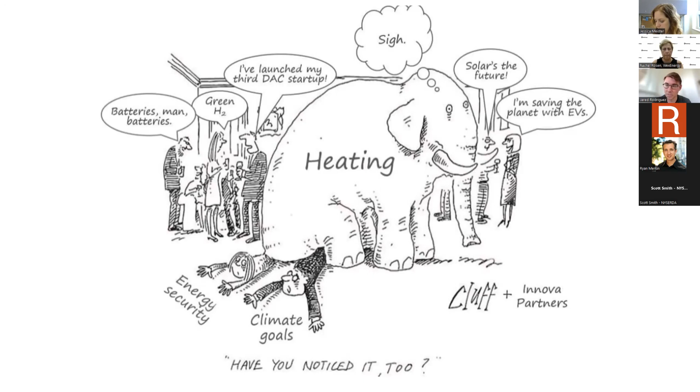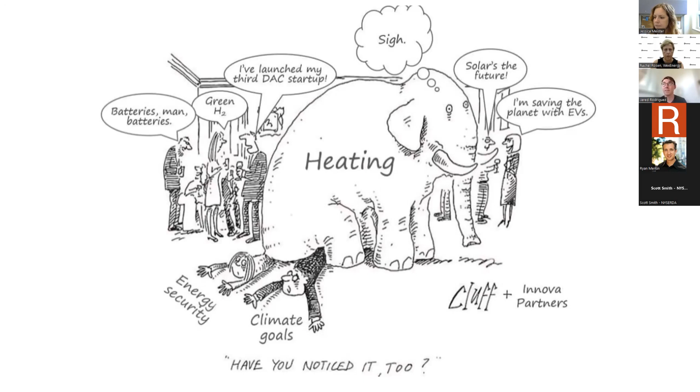This is a sort of funny cartoon where we've spent, I think, the last 20 years trying to ignore the elephant in the room, which is heat. There's a lot of good people talking about it, but in general in society we tend to ignore it, and we want to focus on solar, controls, software, lithium-ion batteries, and electric vehicles when we talk about decarbonization. Finally, we're starting to have that conversation around buildings and heat.

We're also starting to have it because we have this problem person we have to deal with on the border of Europe. So this issue of heat and natural gas, potential scarcity, is coming to the fore, and we're trying to determine ways to move our buildings and industry away from gas for geopolitical issues, and then obviously also for emissions.

It's really important to share that we've had the promise of very cheap natural gas for quite a while. We could talk about why and how that happened, but we can't necessarily rely on very cheap natural gas going forward, since it's now an international or global commodity.

With the fracking boom, there was an impetus to develop liquefied natural gas terminals and ship natural gas to other markets. With Russia now being offline in providing natural gas to Europe, a situation which is likely to get worse, other markets including Japan, China, and predominantly the EU are asking us for natural gas, and we will pay significantly more for it, particularly this coming winter.

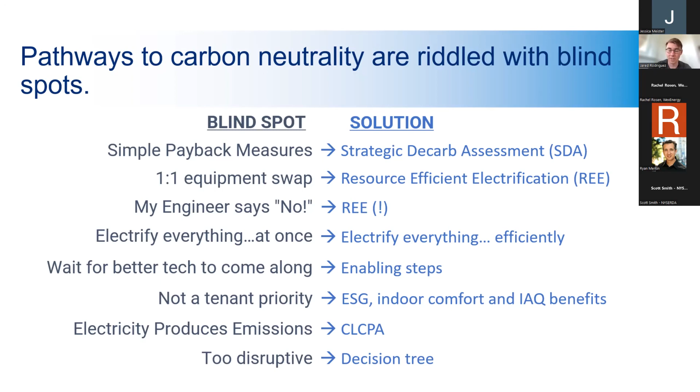And that this is too disruptive - well, then you just need a decision tree. You need a plan. You need to strategically plan for this over time and not just react to fire alarms if and when your boiler fails. Have a plan for your boiler so when it fails, you know what you're going to do.

So strategic decarbonization, or we could call it capital planning, is basically long-term financial planning for building owners to manage carbon emissions. The place to start is really to determine the term - what's the goal, in what year do you want to achieve carbon neutrality?

And it can be optimistic, progressive and forward-thinking. Even if you don't think it's viable, you should still set a goal, and then feed in the baseline starting point - all the existing conditions, how the building is operating - and develop a discounted cash flow model with as many scenarios as possible. If you have limited time, limit the number of scenarios you develop. But you have time to do this, because your goal might be in 2050.

Definitely value non-energy benefits - include that with energy savings in order to justify an investment. And it's also important to note that near-term years require more accuracy, obviously.

And then if we're looking out, it's more directional and sort of fuzzy. You can have fuzzy math if you're doing long-term planning. And then I think the idea of phasing in and strategically deploying retrofits in a particular order is absolutely critical.

So here's some high-level themes around what is driving this concept of resource-efficient decarbonization. We have a grid peak today, generally in July on a really hot day like yesterday, when a lot of folks are using electricity to cool. If we were to do unmitigated electrification, meaning very low efficiency electrification across the board, we would drastically increase that grid peak and shift it into the winter.

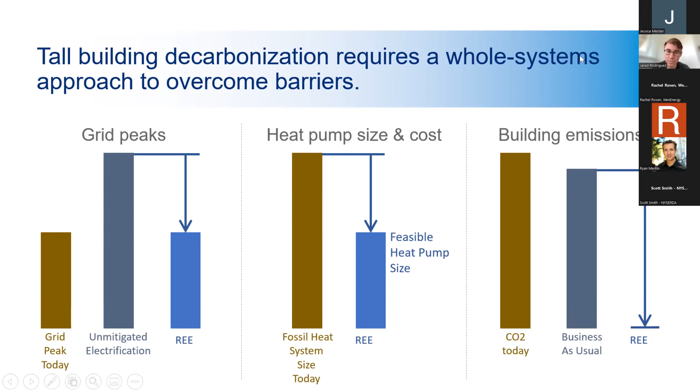We can do better than that, and we should be driving our coefficients of performance, which is basically the amount of electricity it takes to deliver a unit of heat, as high as possible.

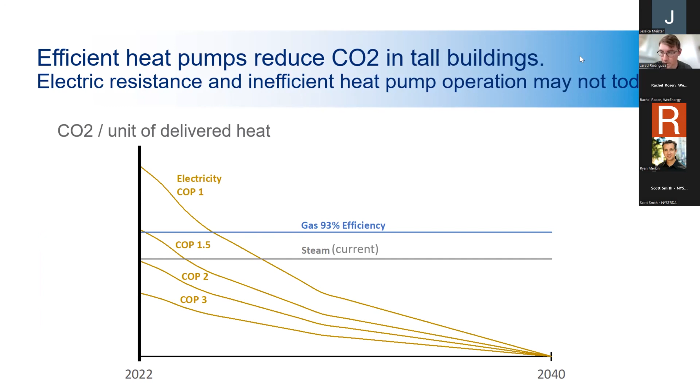This is a statistic I read recently: if we can, in general, create an average COP of 6, which might seem unattainable, but we'll talk about it, then we may not need to dramatically increase the size of our electric grid. So we need to be figuring out ways to drive that COP up, and there are ways.

So what is resource efficient decarbonization or electrification? Really, you could call it whatever you'd like. We've had pushback around the word electrification because it conjures some negative things, a lot of which comes from the 70s when people were installing a lot of relatively inefficient electric heat. So we've shifted our language toward decarbonization. Words matter, it determines how we think about things and how we approach buildings. We need to be aware of what language we're using with the general public when talking about how to approach this issue.

So what is it? It's an incremental methodology, an integrated design process or approach combined with strategic capital planning, that creates a path or multiple paths toward achieving carbon neutrality in buildings.

And so where do you start? On the left side, you start by reviewing that building in depth, understanding where natural gas is being consumed in the building, exactly where, when, why, how, and what that gas consumption profile looks like across various weather patterns and across the temperature spectrum the building experiences throughout the year.

Once you know that like the back of your hand, you can begin the process of targeted reductions in consumption. Reduce really is just energy efficiency, it's high performance buildings, it's what we were talking about earlier with window overclads and improving the thermal performance of an envelope. We need to reduce energy consumption in buildings, particularly on the gas side, on the heat performance side, before we dive into the work around electrification.

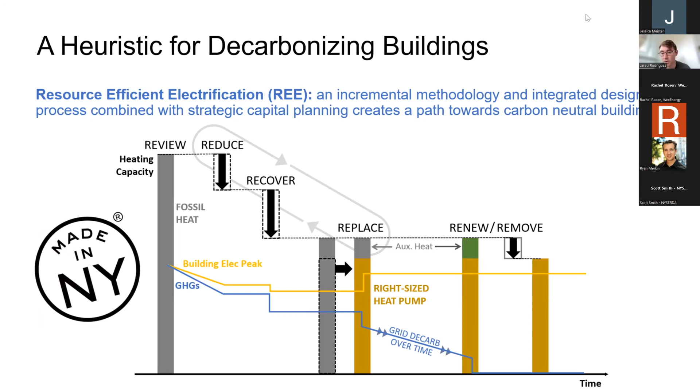Then, start the process of right-sizing heat pumps in a targeted approach that takes place over time to replace that heating capacity. This might mean that you're keeping auxiliary heat around for some time until the technology is available, until the capital is available to go all the way and eliminate your natural gas connection.

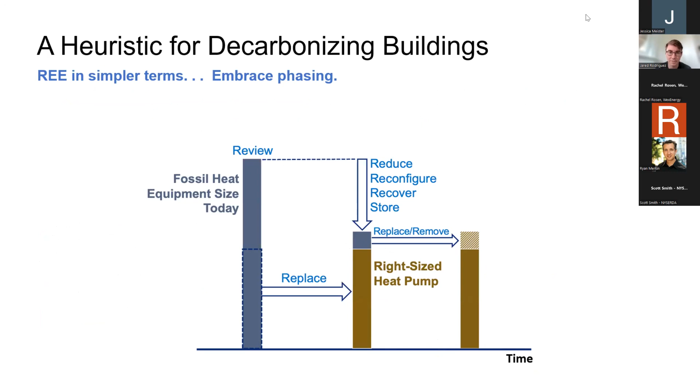I don't know why I show this. It's a simplified version of what I just showed you, but now you're an expert on it, so I don't have to spend time on it. Here's a number of different ways to review, reduce, reconfigure systems, and recover heat.

We know that one of the more efficient ways of moving heat around a building is through hydronic networks. This idea that there's a thermal energy network in a building, and we can capture heat where we're losing it and put it back into the building and move it to where we need it. Doing that in water is typically one of the better ways to do it.

I recognize that a lot of buildings don't have hydronic distribution. Commercial buildings, it's a little bit better. You do have a cooling tower loop that you could potentially reposition for heating. But it's something to consider.

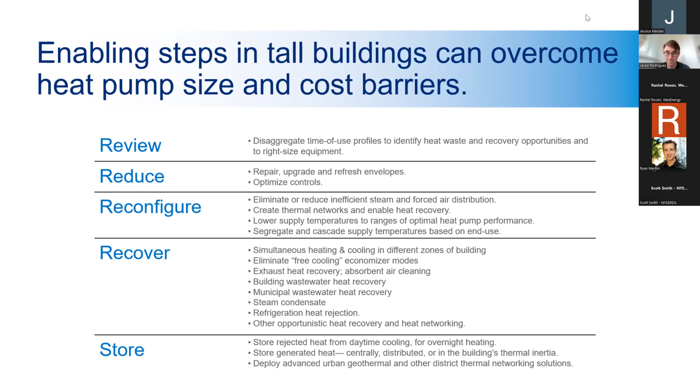We have partners in Empire Building Challenge that are core drilling. They're adding hydronic loops to their buildings so that they could do that heat recovery, hybridization with heat pumps. Then supplying heating and cooling to apartment units, for example, with fan coils.

So office buildings, there's a really interesting opportunity in office buildings to recover and store rejected heat and use that to heat the building. There's a number of ways to do it. There's tons of different technologies that can be integrated together with your MEP engineer and design engineer.

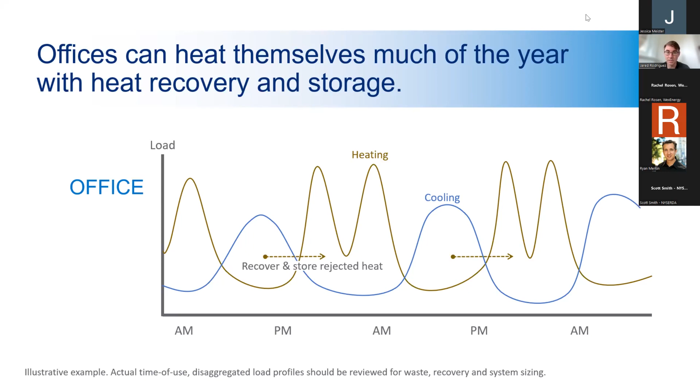But this idea that there's simultaneous heating and cooling, this is real, especially for some of our newer, very large glass office buildings. You have solar heat gain generally all year long, even in the dead of winter. And you've got data centers, and there's lots of heat being generated in these office buildings. So capture and try to put it back in.

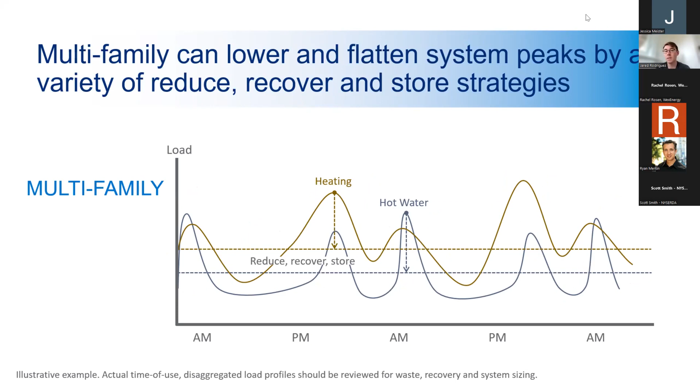In multifamily, it's sort of a different profile. There's like an AM high hot water use, and then there's sort of an evening high heating demand. Where those two things overlap are both difficulties, but also opportunities to reduce the peak electric capacity being consumed in the building in a high electrification scenario.

So I think all of that is to say that we need to be thinking about design integration. We need to be thinking about heat as electric capacity in a high electrification scenario. And we should be figuring out the most efficient ways of capturing, moving, and storing that heat over time so that it can be used where and when it's needed.

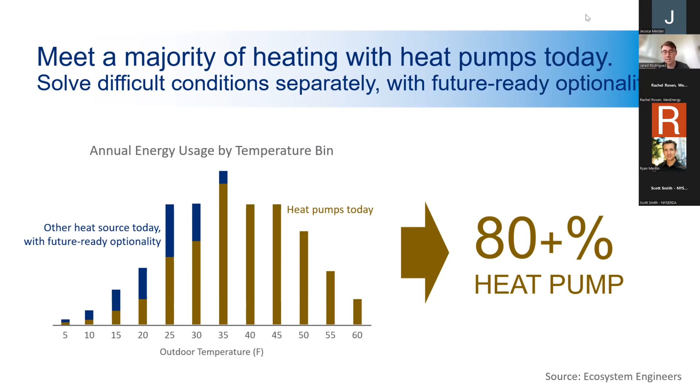So we shouldn't start a design project or an electrification project by focusing on that peak load, on those very cold temperatures, because I think you will find pretty quickly, especially in a large building, that trying to hit that peak load with, say, an air source heat pump is going to be exceedingly difficult for a whole variety of reasons. So it's better to start to think incrementally about it, break down the heating profile, and figure out how you can start to hybridize that building and deal with the lowest hanging fruit first.

Networked distributed heat generation, say with window air source heat pumps. We're seeing NYCHA do this actually, deploying relatively efficient air source heat pumps in windows and then networking those so that they can be modulated in a way so you're not peaking the building in the winter. And just the concept that we could be more efficiently producing heat at high COP by extracting waste heat, moving it around, and then thinking about what the future looks like, where we might be entering the public right of way and sharing some of that extracted heat between multiple building typologies.

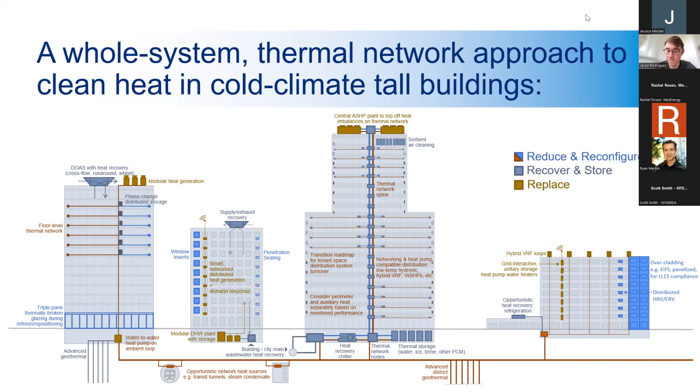So just to recap this decarbonization process, right? We start by assessing existing conditions, establish the goal, build the team. The team is critical. It should be diverse. It should include a lot of different verticals inside your organization.

Oftentimes big real estate companies are very siloed and they don't generally speak to each other. So asset managers aren't talking to engineers. It's kind of a mess. So everyone needs to get on the same page, speak the same language, talk to each other, and align on objectives, and then adopt that resource efficient electrification or decarbonization approach.

And don't be afraid to have design charrettes. If you don't know what a charrette is, it is multiple stakeholders around a table, iterating on ideas, poking holes in ideas, throwing even crazy ideas on the table to see if something sticks.

Then you can go about conducting that strategic decarbonization assessment, because you can then see what the full spectrum of potential options is for a particular building or even a district. And then you can go about the business of ranking that based on economics, doing your project prioritization, capital planning for that, and then refine and iterate, because conditions always change, right? So this is not a static plan, it has to change over time.

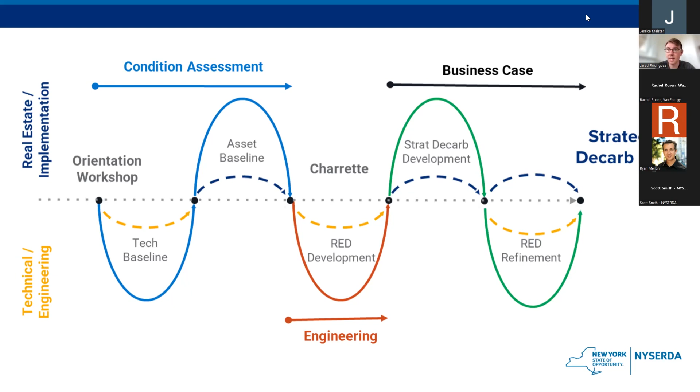So here's a graphic just showing what that process looks like in general. There's a back and forth between asset management or real estate and technical and engineering. This is the process we are using with our cohort partners in Empire Building Challenge: doing that technology baseline, what's in the building, doing the asset baseline, who's in the building and what does the building need to be to serve them, and then together developing that approach, that resource efficient decarbonization approach, strategic decarbonization planning, and then refining so that you can develop your final plan, which again is not static.

So just to jump back to thermal energy networks really quick, and this is sort of an add-on to this presentation, because all of this is new. I mean, that law just passed generally in June. Thermal energy networks are not new.

We have a system in Jamestown, New York, which is high temperature hot water. It's coming from a power plant, a cogeneration plant. It's serving every building in the central business district. That project started in 1984, and it was seeded by a grant from NYSERDA. So that's how long this goes back in the state of New York.

You can think of the Con Ed system as a thermal energy network. It doesn't totally matter what heat transfer fluid you use to move heat around, but we're finding that lower temperature water is better because it's technology agnostic, meaning you can plug in a lot of different technologies. And as new technologies become available, it's highly likely you'll be able to plug those into a lower temperature network.

So again, like I said earlier, it's critically important that we drive these coefficients of performance for heat pumps up as high as humanly possible or technologically possible, so that we aren't exploding our electric grid. It's not sustainable to build out an electric grid that is 5 or 6 times as big as it is today, because of the mining impacts of copper, et cetera. So it's expensive to build electric distribution.

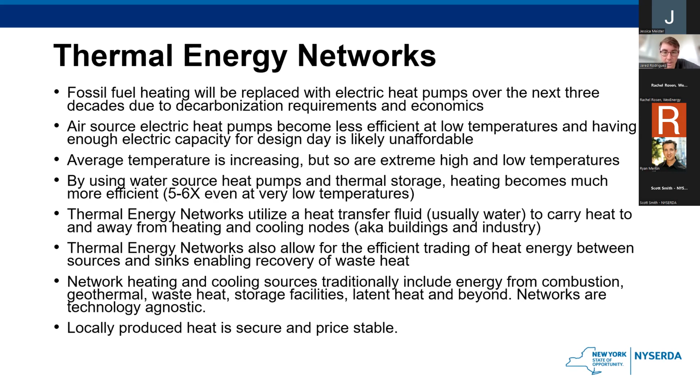I think about Indian Point a lot. Whatever you believe about nuclear energy, since that plant was built, for its entire life, we've dumped all of that excess heat into the Hudson River. That's not acceptable. This was zero emissions heat that was being wasted—heat that could have heated quite a lot of buildings, perhaps the entire central business district, or more in Peekskill, for example. So it's not acceptable to be wasting heat in a world where we care about climate change.

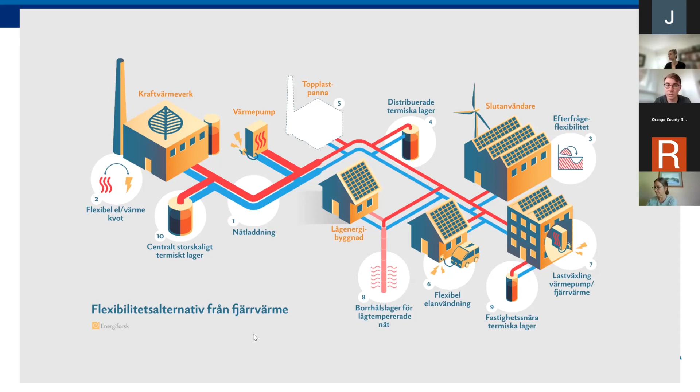Just going to move on to the next slide. Okay, here we go. So how do you go about doing this? How do thermal energy networks emerge? Well, the Geothermal Technologies Office and the U.S. Department of Energy recently released a grant program meant to seed the development of thermal energy networks in communities.

And they've recognized that we must form coalitions in communities, because this is complex. It involves a lot of different people. It may include the utility. It definitely includes the municipality, plus potentially private enterprise, labor, workforce development, and development of projects in general.

And so those members might include government bodies, policymakers, other officials—county, local, city, state—industrial development agencies and other organizations, public and private regulated utilities. We've got a number of municipal utilities in upstate New York that could be leading this effort. Activist and community-based organizations for sure, faith-based organizations, solution providers and manufacturers, and our labor.

And so some of the next steps on potentially developing thermal energy networks in communities could be engaging with a thermal development team, in a way I would call BlocPower. They created a partnership with the city of Ithaca. They are a thermal development team. They are going to go and do customer acquisition to get folks to convert to heat pumps in order for that city to achieve its very aggressive goal of decarbonization within a pretty short period of time. So you could imagine a company like that as a thermal developer.